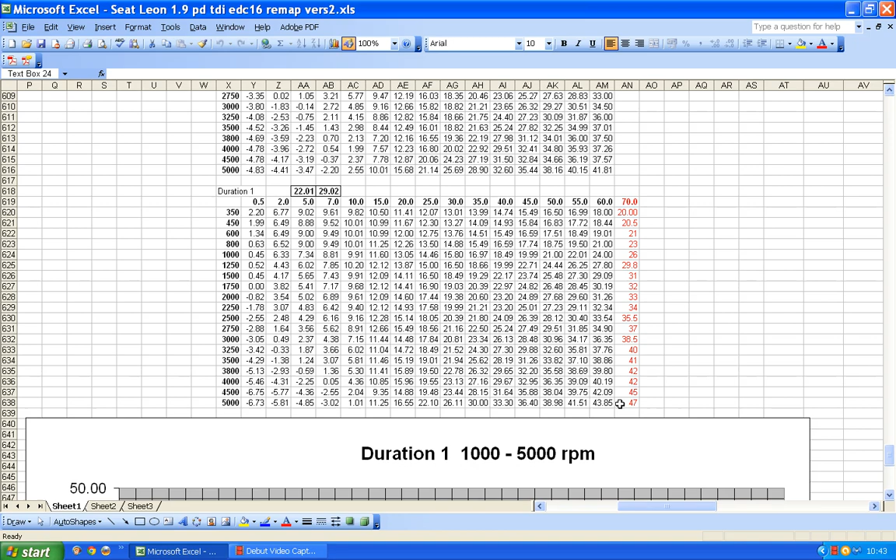So that 27 degrees is the exact point, instant injection of fuel. We know that we are going to be wanting to inject at this point, according to this map, 60 milligrams. And if we go to look at the map that we've been told we should look at, the duration 1 map, there we have 43.85 degrees. So in other words, 44 degrees more or less.

So what we've got then is, I'll put it there, a start of injection which is 27 degrees. So that's what we've got there. In fact, it would be better probably if I put start of injection up there, wouldn't it? And if I say that's my start of injection point, I'll get rid of that.

Let's just format these to ordinary numbers. So I'll just have cells numbers, and we'll have 1 decimal point. That will do us for now. So we'll have start of injection. I'll make those bold as well so we're clear.

So we're going to have our start of injection point of 27, and we know that that's going to give us a duration value which we just saw over here, 43.85. So we're going to have a duration of 43.85 degrees in there. Oh no, I'll make that 2 decimal points. Sorry, I was a bit stupid there, wasn't I?

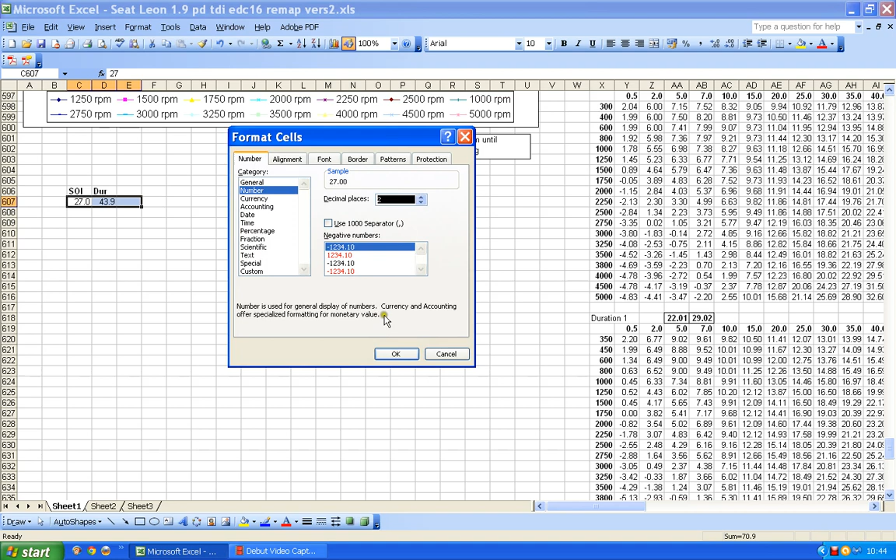Number, 2 decimal points. So we've got a start of injection of 27 degrees and we've got a duration of 43.8 degrees. So we can calculate end, I'll put E, a little O and a big I. We can say when injection is going to end, can't we? I can call that end of injection. So I've got start of injection, an amount of time for injection, and an end of injection. So I can say to myself, right, if I start there, this is where I will end.

Now remember, this one is before top dead center. So if I assume that that is 27 degrees, this number here will equal that number minus this number. That seems to be complaining for some reason. Oh, it hasn't got enough space for the minus sign. So we'll just extend that out a fraction. There we go. It's giving us minus 16.85. In other words, 16.85 degrees after top dead center.

So what we've now got is a start of injection at 27, a time for the injection of 44 degrees, and because that injection is so long, we are not going to finish injecting until nearly 17 degrees after top dead center. Now we would be pushing our luck to change those figures by very much. If we try to change the duration here, what will that do? Well, we can easily see, can't we?

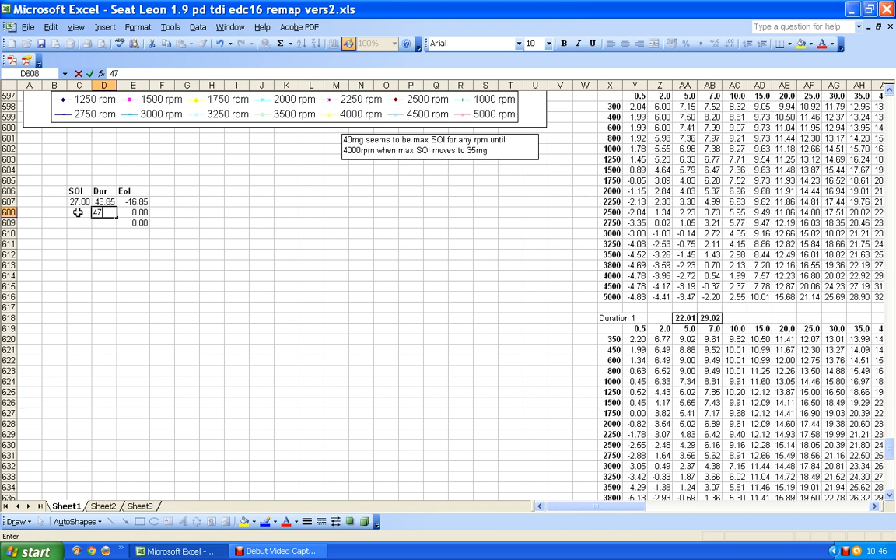Because if I just drag that calculation down and I give myself a longer duration, I'll say I'm going to inject for 47 degrees because I want more fuel. But then I leave the start of injection in the same place as I did before. And sorry about the way the numbers have gone silly on me. Let's just format those. Number, 2 decimal places, that will do.

Okay. Now I'm finishing at minus 20, in other words 20 degrees after top dead center. So I'm starting at 27, I'm going for a duration of 47, and I'm ending at minus 20. Now you can see that if I'm not careful, I'm going to come really unstuck here, because the designers thought that 27 and 44 were okay, so that they could end at roughly 17 degrees and still get power. Now remember, at 17 degrees after top dead center, the piston is starting to go down before the combustion stroke is even pushing it down.

Now obviously the engineers have worked out that that is just about okay there. Now why didn't they just make it 20 or 30 or 35? Well, they didn't, because if they go to something like 20 degrees after top dead centre, the piston may already be moving too fast down the cylinder for the actual explosive combustion to catch it up. In which case, we are not actually adding any energy to the piston, because the piston's moving away from us faster than the explosion that we're giving.

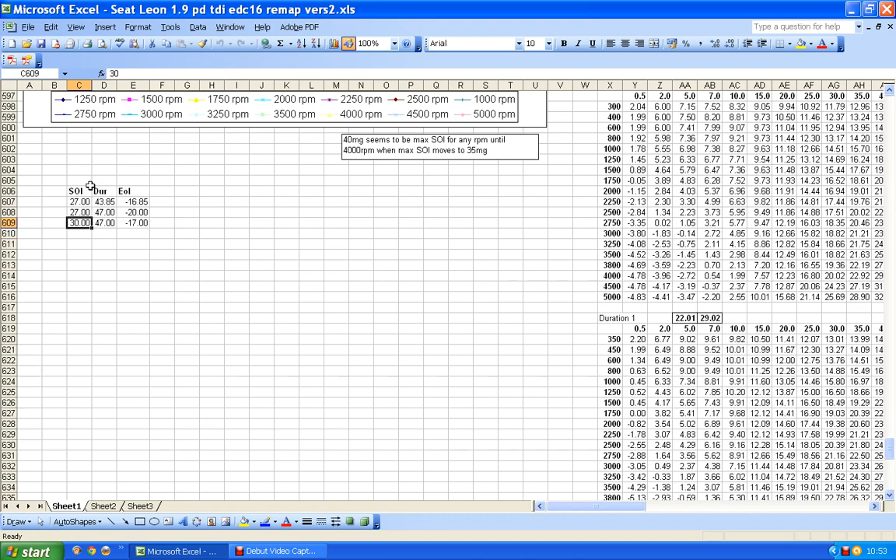So if you've changed duration and you now feel you must change start of injection, you don't really change start of injection by changing start of injection. You look closely at your duration values, at where that will leave your end of injection, and then where you might want to shift start of injection to allow that slightly longer duration. So the whole thing really starts with duration, even though start of injection selects duration maps. Seems daft, but that's just the way it goes. You start with your duration, look at where start of injection might be, where that means you might end, and then where you should consider changing the start.

Now, I suggest, and some people have argued with me about this, that you never make a change of more than 1 degree at a time. So if you decide to increase duration and think you might have to move start of injection because of what's happening at the end, then never go more than 1 degree either way.

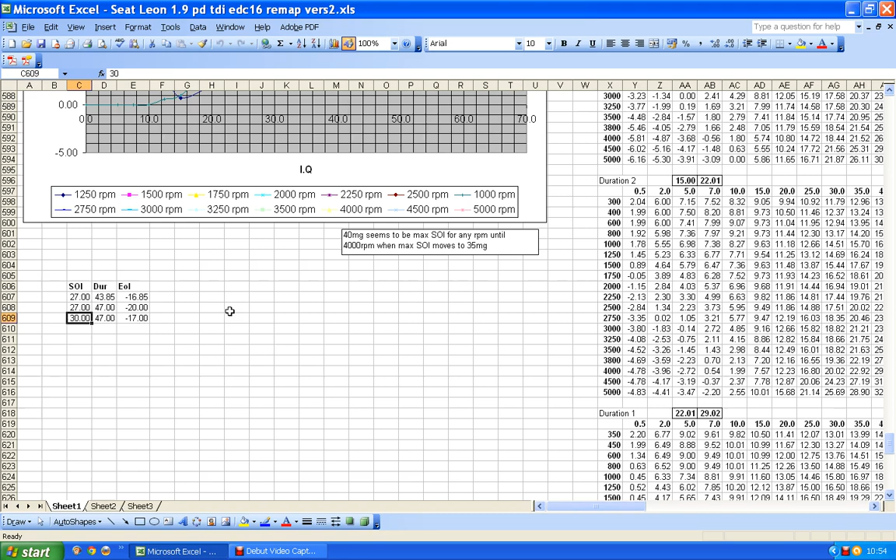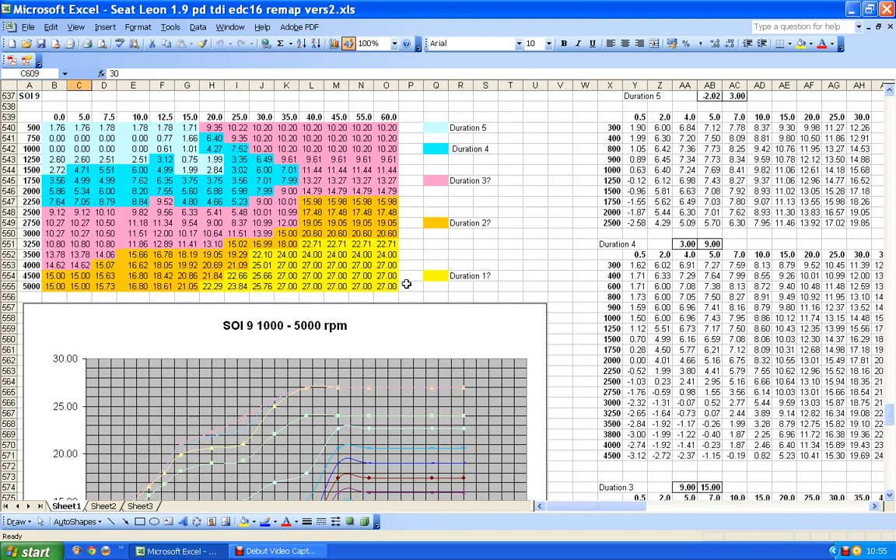So in other words, you say to yourself, well, if I make that 44, 45, I'll move this one to 28. So I will make those two changes together. So when it comes to making changes to start of injection, the changes that you might want to make are very, very minimal. In other words, you might want to add an extra column on the end here, and for the most part, most of these values you won't really want to touch, but you might want to change these values here. But you only want to change them, as I've just said, according to calculations you've already done with original start of injection, change duration, end of injection.

Now, give an example here. I'm not going to go into this in big detail because once you've got the hang of it, it's fairly simple. If we call that one 44, so we say that one's going to be 45, then that gives me an end point of minus 18. I'm not happy with that, so I say to myself, right, I will still use 45, and then in here I will use 28. So I will go 28, 45, 17. So these are my new figures.

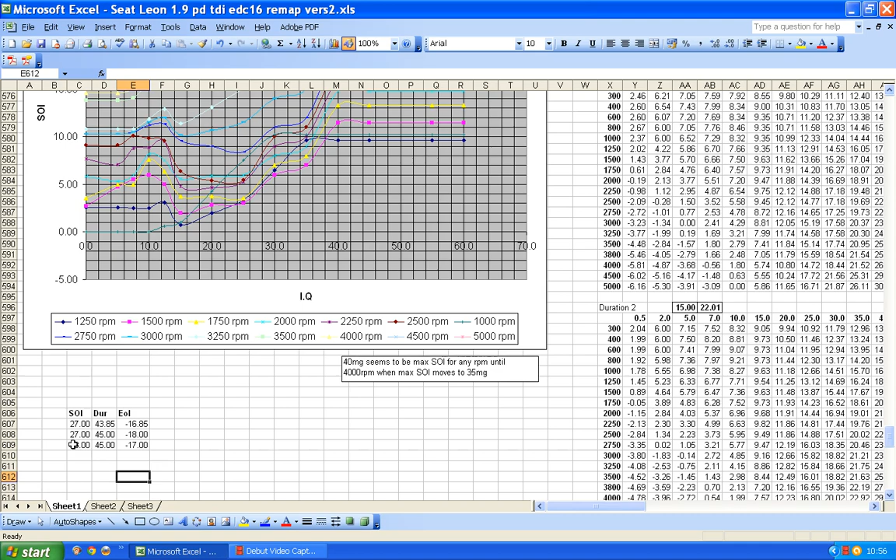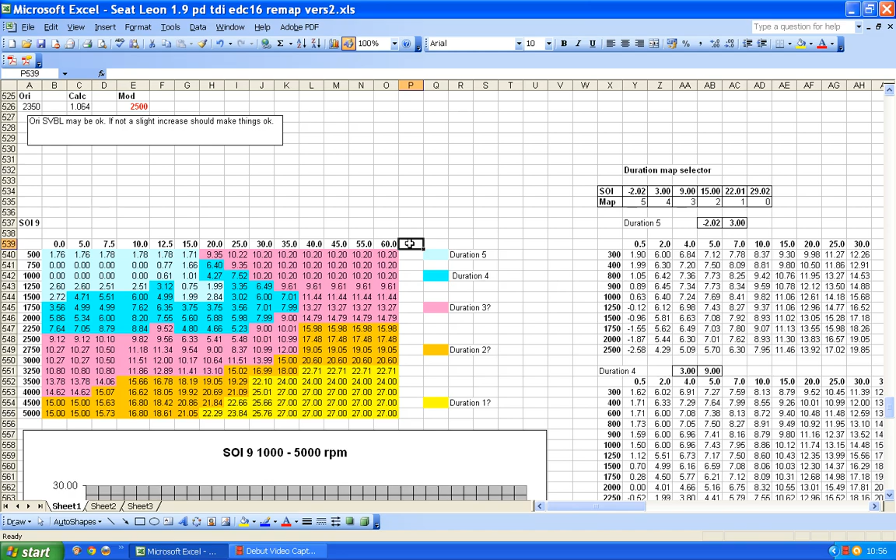So then I would just go to this, I would put in my new column, let's say it's going to be 65. I would look at the figures for each point. So this point here, I've decided that if that is 65, what I would like this one to be is 28. So I would change this one to 28. So I would have 65 here and 28 there. The formatting is daft again, but I'm not going to bother to change that. You can see what I mean. So that would be 65 and this would be 28.

And then I would make exactly the same calculations for these positions, but I would probably not go back all that far. I would probably go back maybe a little way back at first, or maybe go all the way back. It depends. Now, this is where sometimes start of injection changes can be beneficial without giving you a massive great big kick at this end. So in other words, sometimes a slight change of start of injection down this end can make the car feel much nicer to drive.

The big problem with fiddling with start of injection is that you will have quite a change to the emissions, and so you need to think carefully about what you believe the environment around you is worth. Because by changing start of injection and making it earlier, you can have quite a big impact on the amount of nitrogen oxide that comes out of the engine. So at the end of the day, you need to think to yourself, do I just want a better car to drive that I'm happy with, I don't care about anybody else? Or do you go for the best you can get without poisoning the atmosphere? Now the problem with that is that VW have already done the best they can get without poisoning the atmosphere. So if you want better than VW could do, the chances are you're going to produce more pollution. So that's a question for you to bear in mind.